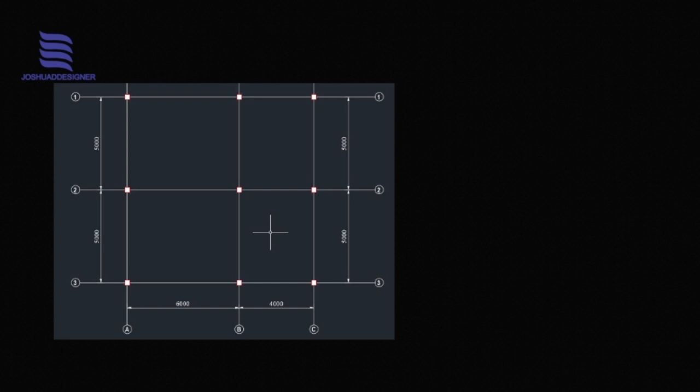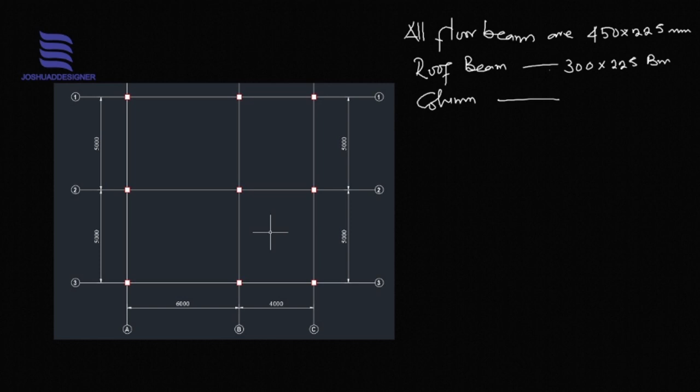All right, so we want to note the following details. All floor beams are 450 by 225 mm. The roof beam 300 by 225. The columns 225 by 225. Then you want to also note that the finishes is taken as 1.2 kilonewton per meter square.

Partition is taken as 1.5 kilonewton per meter square. The roof load, and we want to combine the dead load together with the live load, to be 2 kilonewton per meter square. Then we'll have the wall load. The unit weight of the wall 2.87 kilonewton per meter square. Then we have the slab thickness. We want to take that as 150 mm.

All right, and we want to consider this building as residential. So for the live load, the occupancy being residential, we are considering 1.5 kilonewton per meter square. All right, so this information will be very, very vital as we go ahead in doing our calculations, estimating our loads. So we want to just go ahead now and do the necessary things to achieve our enterprise. The first thing we want to do is to determine our slab loadings.

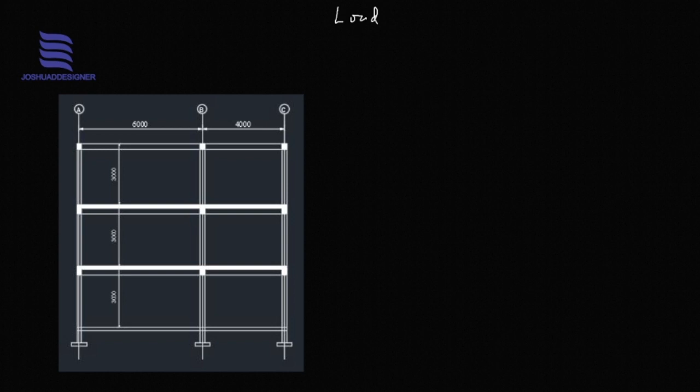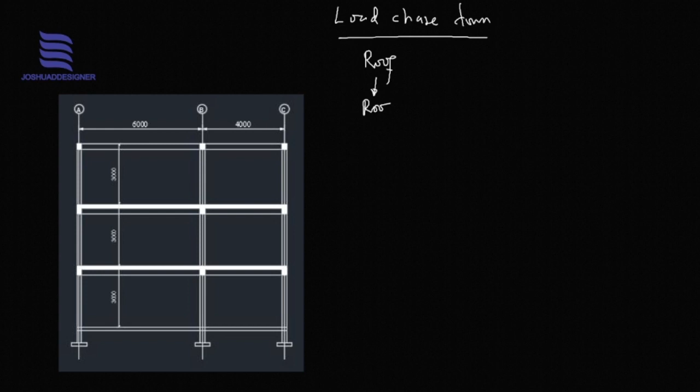All right, but before we do that, we want to look into the load chase down. You may just call it the system of how the loads are being transferred down to your foundation, starting from the roof. So following the same principle, the roof load goes to the roof beams, and the roof beams here in this case being transmitted to the columns.

Now this system that we have here represents that for the second floor, and we have the second floor slab going to the second floor beam, then goes to the second floor column. This sorts for the second floor, or rather we have just played with our floor titles so that it won't confuse our communication.

This is the roof, this is the second floor, this is the first floor, and this is the ground floor. So we want to talk about the second floor here, then we'll talk about the first floor here. Yes, I believe somebody is confused right now.

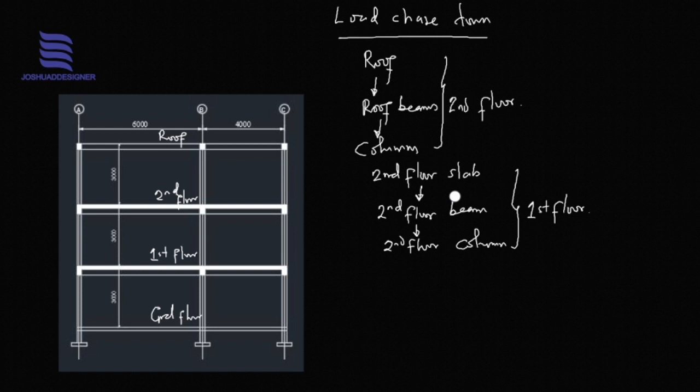The roof to the roof beams and the roof beams to the columns, that represents the second floor to the roof. And this one, the second floor slab transfers the load to the second floor beams, and from second floor beams we get to the second floor columns. So that's for the first floor. Then we move next to the first floor slab to the first floor beam, and then we have the ground floor column.

This stands for the ground floor system of load transfer. Then finally we have our foundation. So this is primarily how the load works in transfer from the roof to the roof beams,

the roof beams down to the column for the second floor, and for the second floor to the first floor we have the second floor slab, goes down to the second floor beams, then down to the columns. All right, then for the first floor it takes the first floor slab down to the first floor beams, and from the first floor beams down to the ground floor columns, then it goes right into the foundation. All right, so this is just a basic understanding, so let's get into our calculations.

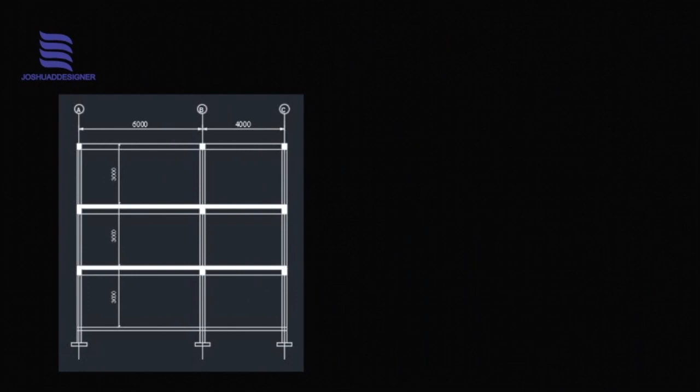All right, so we want to first calculate our slab loading, of which by now we should be familiar with one or two things around the slab loading. So the first thing we want to calculate is the slab own weight, and we've been told from the information we have earlier that the slab thickness is 150 mm. So we want to make use of that information. 0.15 multiplied by 24, that gives us 3.6 kilonewton per meter square, right?

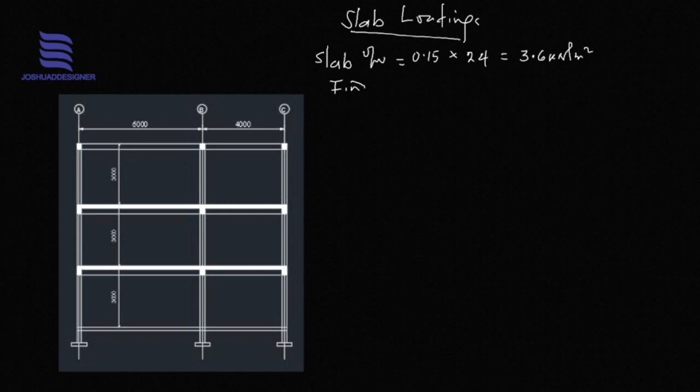So we have the finishes also, of which we have been given that information earlier to be 1.2 kilonewton per meter square. We have the partition as well, we have been given that information also to be 1.5 kilonewton per meter square. Okay, in all we have 6.3 kilonewton per meter square as the dead load. Then the live load, as we have been told formerly, being residential, will have 1.5 kilonewton per meter square.

So for our slab now, the ultimate design load for our slab, we know 1.4 Gk plus 1.6 Qk, and that would give us 1.4 multiplied by 6.3 plus 1.6 multiplied by 1.5. So that would give us 11.22 kilonewton per meter square. All right, so that's our load from the slab. So we'll need this information as we proceed in our load estimation.

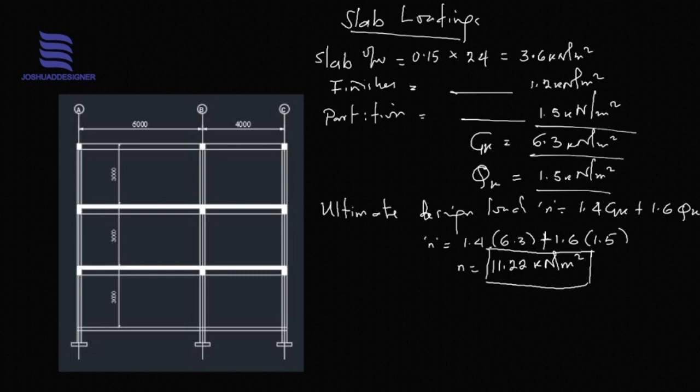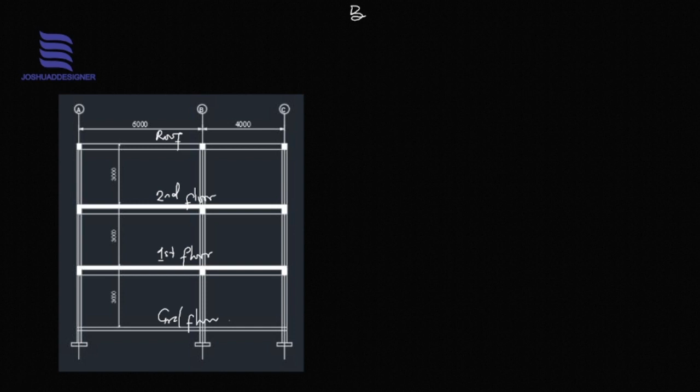All right, so the next one we want to determine will be our beam loadings. So we do not forget that this is our roof beam at roof level, our second floor, then our first floor, then we have our ground floor. So how do we estimate the beam loadings? And do not forget that the section for our roof beams is quite different from that of our floor beams. You see, for our floor beams we have 450 by 225 mm. For the roof beam we have 300 by 225 mm. So it's quite different, so our estimation should reflect that rightly.

All right, so we'll have the roof beam here first. Let's make calculations for roof beam. So we'll do beam own weight, knowing that the section is 300 by 225 multiplied by 24, which is the unit weight of concrete or density of concrete. You have 1.62 kilonewton per meter.

And because the beam at that level is not expected to support a wall at the roof level, it's only expected to support the roof load, which will be transferred independently. So what we have at that level is just the roof beam, not supporting a wall. So that's exactly what we're going to have for the dead load at that level. So you may want to factor the results by 1.4, and that should give you 2.268 kilonewton per meter.

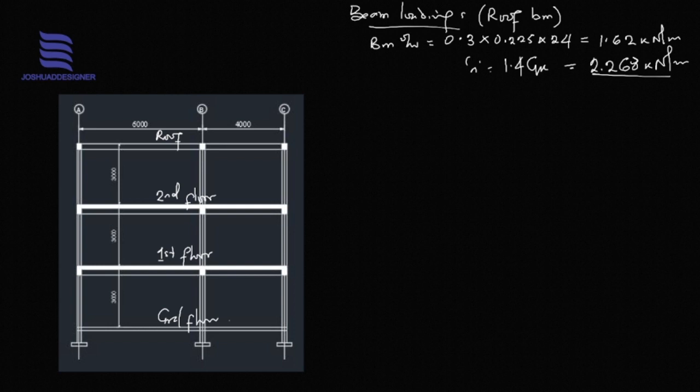Now for the floor beams, which are 450 by 225 mm. So the beam own weight now will be 0.45 multiplied by 0.225 multiplied by 24, and that should give us 2.43 kilonewton per meter.

Now one of those assumptions we are going to make is that we assume that all our floor beams support walls. Now this is not a fixed assumption. If in your own case there are some beam spans that don't support walls, you might do without it and estimate your beam loads without considering that. But for this tutorial, we are assuming that all our beam spans support a wall, right?

So the wall load now will have 2.87 multiplied by the height of the floor, 3 meters. Then that should give 8.61 kilonewton per meter.

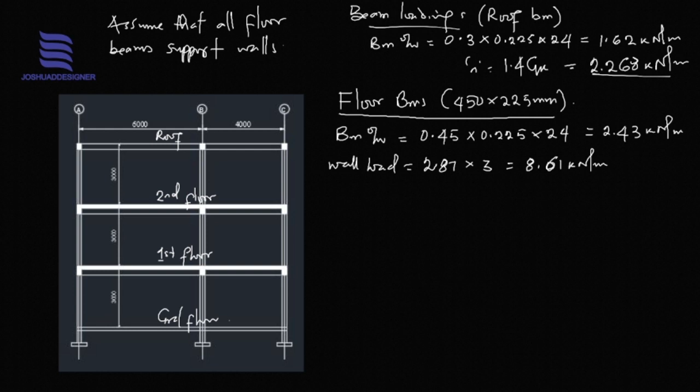So the total dead load at this level should give 11.04 kilonewton per meter. So we'll have the factored load, 1.4 GK, and for this we'll have 15.46 kilonewton per meter.

We'll have the what else now? We have calculated for the beam loadings, both for the roof and the floor beams. So we'll have our results accordingly.

But there's something I want to speak about here for the wall load. If you want to be very precise with your wall load, instead of applying the whole 3 meter floor to floor height, you may want to remove the depth of your floor beam, so that your wall is sitting just below your beam, something like this. So you are doing away with the whole of this beam, 450, so that your wall is sitting right below that.

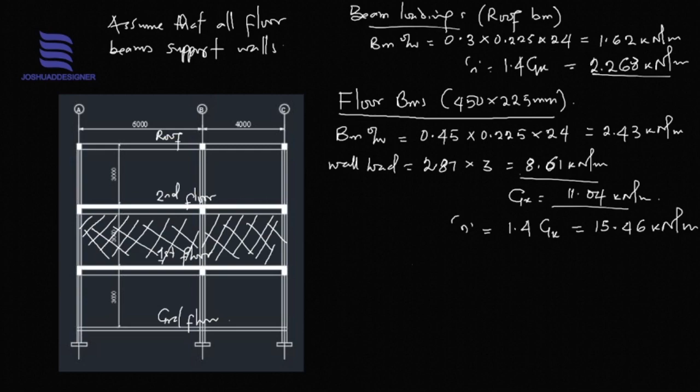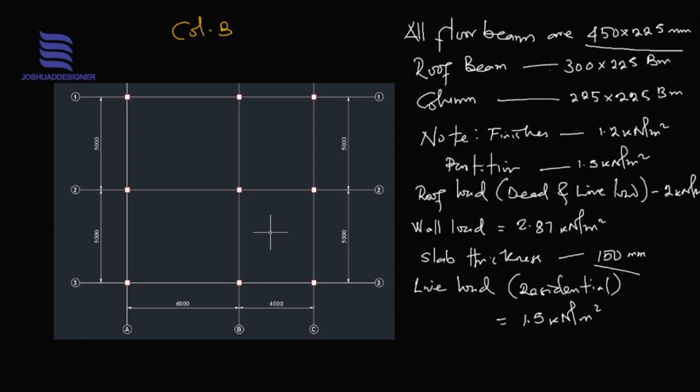All right, so to go further from here, we'd like to begin to do some business around the column load transfer or load estimation. But before then, I want to make an explanation. Now, the column that we are considering today is the central column, which is column B2. This is B here, and this is 2 here. So we are discussing this central column.

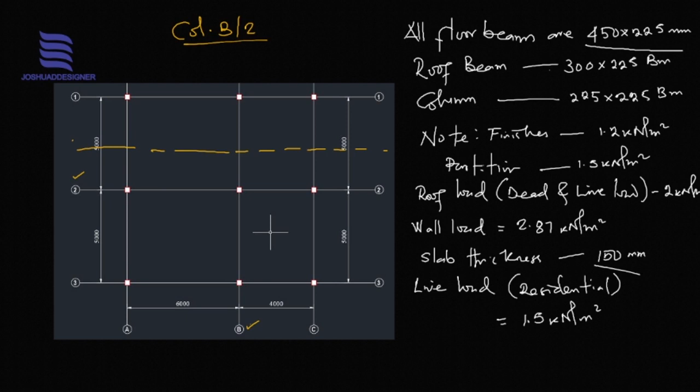The columns are supposed to support loads in this arrangement. Now, this is a central column, for example. When we have half of this span, then half of this span, then we have half of this span here also, and also half of this span here.

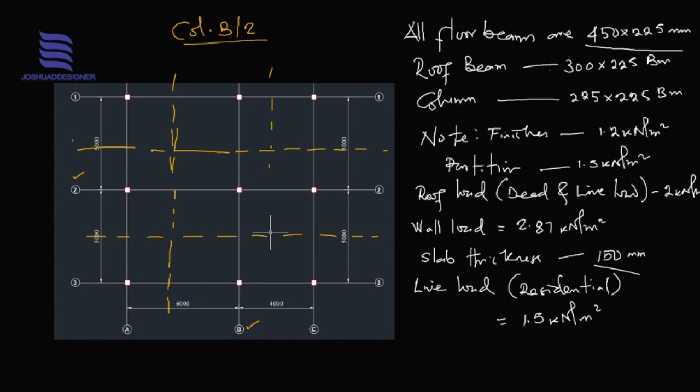When we have this arrangement, the column is supposed to support this area you are seeing, this area. That's the area the column supports, and that arrangement goes for other columns too. So the area within this region is such that this central column supports. The area within that region is such that the column supports.

So how do I know that area? It's very simple. The span between AB is 6 meters in all. Dividing that into two, I have 3 meters. And the span between B and C is 5 meters... it's 4 meters rather. Dividing that into two, I have 2 meters. My line just covered my dimensions here. 4 meters, alright, so we have 2 meters that way.

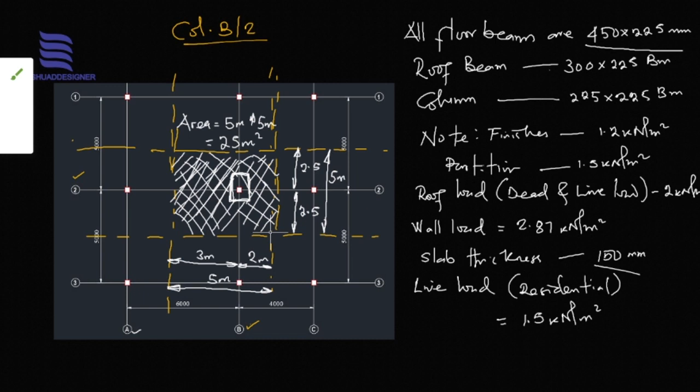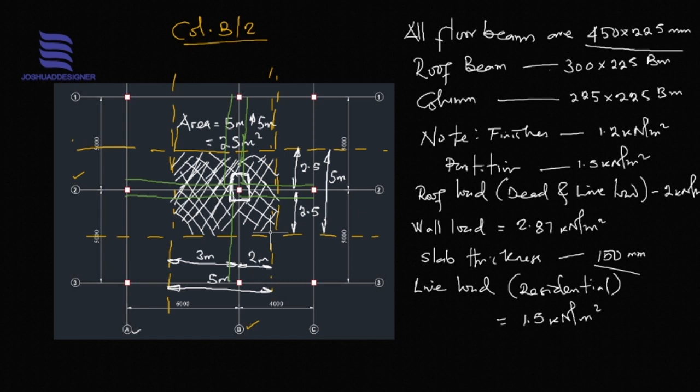Now this 5 meters we have already determined, because if this is a beam to be carried by that column itself, on either side, it's still going to be divided the same way we did our first divisions, half into halves. If we have beams in both directions this way, it's going to be divided into halves as we have done formerly. So we'll have 5 meters on the vertical, 5 meters on the horizontal after we are done with it.

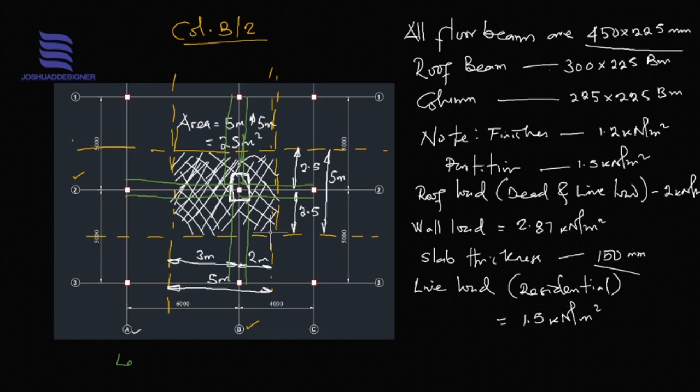So that means the length of beam to be supported is 5 meters on the vertical plus 5 meters on the horizontal. That's 10 meters to be supported by this column. And since we are considering that this layout arrangement is consistent for all floors, the length of beam is not going to change. But in the case where you have a varying arrangement around your layout, you may want to consider the change and apply accordingly.

All right, so with this information that we have just obtained, we can go ahead to do something on our column loadings. So for the column loadings now, for the floor area, we have rightly discussed that and we all agree to have 25 meters square.

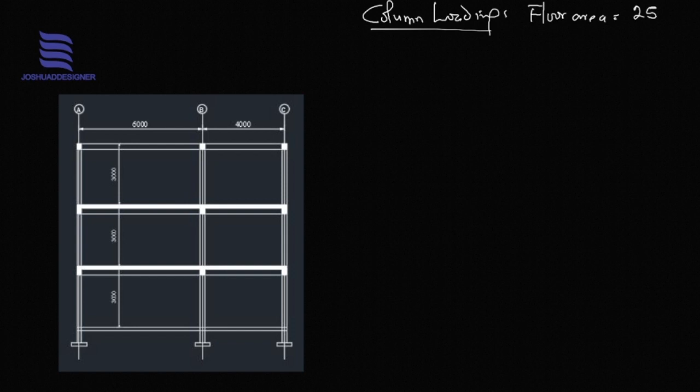The roof load: we'll have 25, which is the area of the roof that column is responsible to support, multiplied by the load of that roof, which we said in the beginning of the tutorial is 2.0, the live and dead load combined together. Then we'll multiply by a factor that accommodates for the ultimate design load for that roof. This 1.5 is trying to find an average factor between our dead load 1.4 factor and live load 1.6 factor.

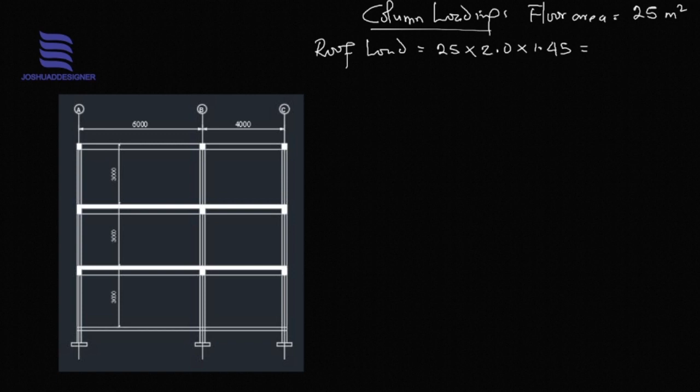However, you may find a factor that works for you and is still accurate. I've proven this to be correct for me, so I can go ahead with it. Also this roof load of 2.0 is not standard for every design, so you want to pick what is unique to your project. Some might say 0.75 for live, 1.1 for dead, or 0.75 for dead, 1.1 for live. Some might just go for 1.5 for the combination of dead and live. So however it is, your type of roof and the structure you're designing for might influence your decision on the factors.

All right, so for this we'll have 72.5 kilonewton.

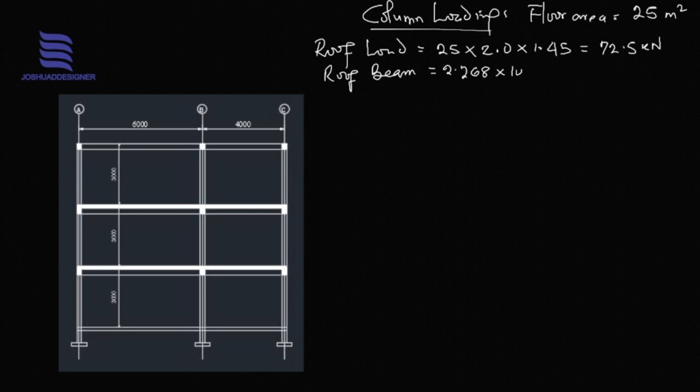Then we'll have our roof beam. The roof beam is 2.268 multiplied by 10. That's going to give us 22.68 kilonewton.

Also we'll have our column own weight: 0.225 multiplied by 0.225, which is the section, multiplied by 24 density of concrete, multiplied by the height of that column. Then we can factor it for dead load. That's 5.1 kilonewton. Adding this together, we'll have a total of 100.28 kilonewton.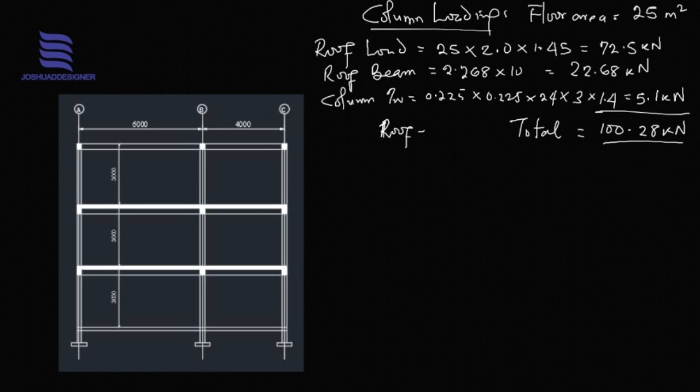Now this is first the roof to the second floor. Of course we know that already. Roof to second floor, so that's sorted out. The next one we're going to do is the second floor to first floor.

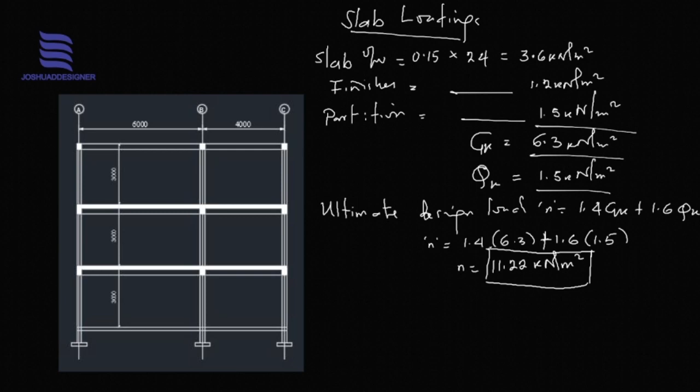All right, so we'll have the slab, or before then we might want to transfer the loadings we just have from the floor above. Loading from above, that's 100.28 kilonewton. Then also we'll have the slab load now. We know the area of slab that's transmitted already, multiply by the slab loadings, the one we did, 11.22 - I told you to keep that value because we need it - and that's going to be 280.5 kilonewton.

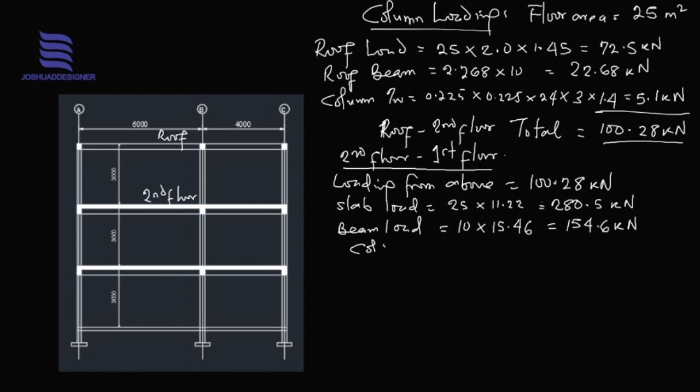All right, so we'll have the beam load also. We already spoke about the length of beam to be supported by that column, and we agreed that is 10. And also we'll have the beam load, which is 15.46 for floors, and that's going to give us 154.6 kilonewton.

So we'll have the column own weight, which is going to be the same as what we already calculated above, 5.1 kilonewton. All right, adding for this floor, we'll have a total of 540.48 kilonewton.

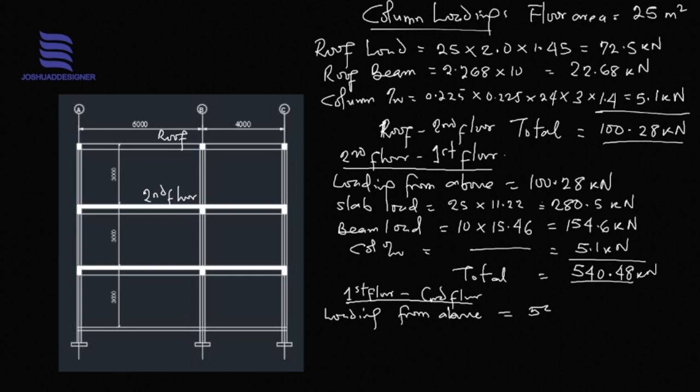So calculating for the last floor, which is first floor down to ground, we have the loading from above to be 540.48 kilonewton. We have the slab load to be 280.5.

Reason being that the slab area is the same, the loadings for the floor is the same, so it's going to be the same thing for the slab and the beam also for both floors, and that's 154.6 kilonewton, and the column also the same 5.1 kilonewton. So the total we're going to have up to the ground floor, having done all this, we'll have 980.68 kilonewton.

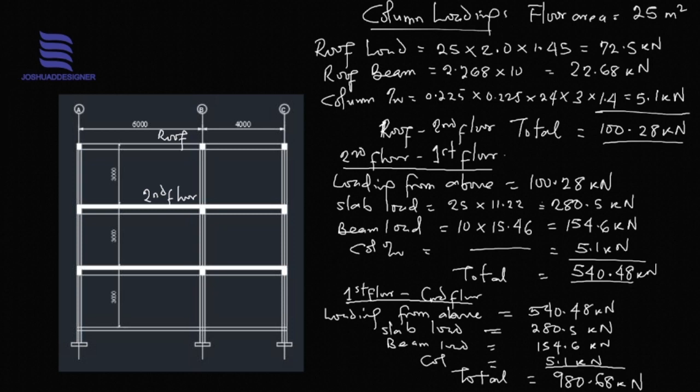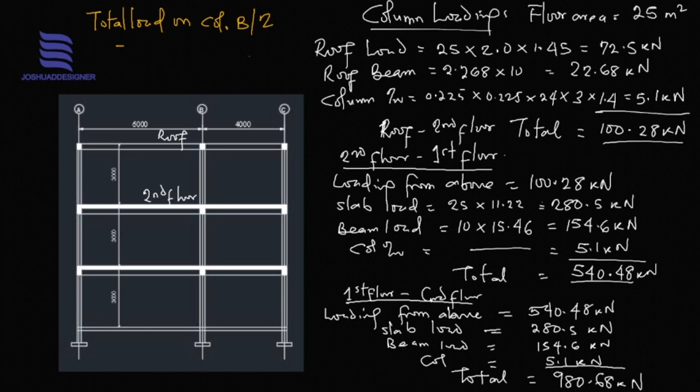All right, so we might make a very reasonable conclusion at this point to say that the total load on column B2 or 2B, however we call it, is 980.68 kilonewton, say 1000 kilonewton. And this would answer to how much. So at first we can make a conclusion that column B2 has a load of about 1000 kilonewton transferring, or that is being transferred to the foundation.

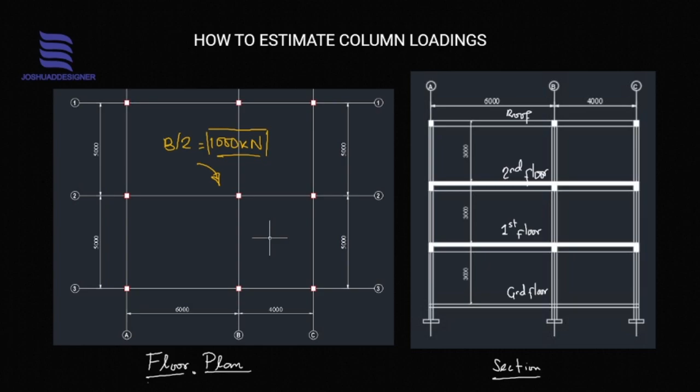All right, so with this, I believe you should be fine. We all now should be able to estimate our loadings on columns effectively.